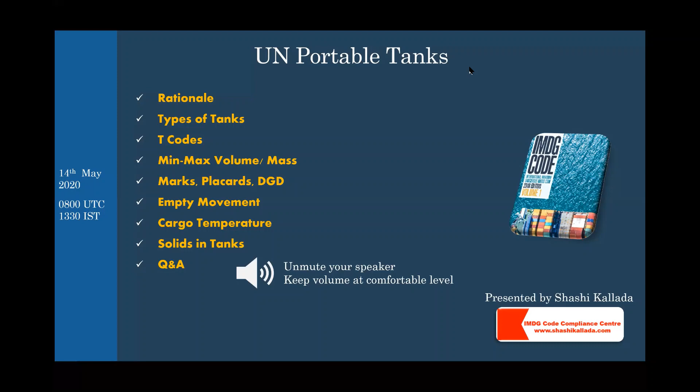IMDG code is the International Maritime Dangerous Goods Code, published by the International Maritime Organization. Every 2 years, the code is revised and republished, taking into consideration the lessons learned from past accidents, as well as new technological developments. One of the most recent revisions happened in the 2016 edition of IMDG code, considering the accident on MSC Flaminia because of polymerization hazard.

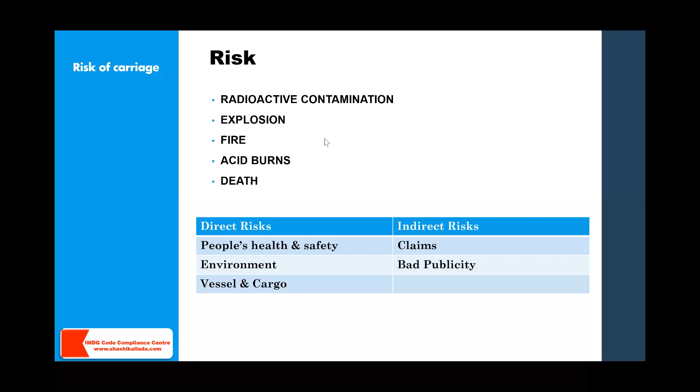This is the summary of casualty and incident reports submitted to the International Maritime Organization in 2018. I have just highlighted certain points related to placarding, marking, documentation, and portable tanks. In this summary list submitted to IMO, you can see portable tanks not covered by CSC convention were 0.26% of the total inspected or found, and some of them had serious structural deficiencies.

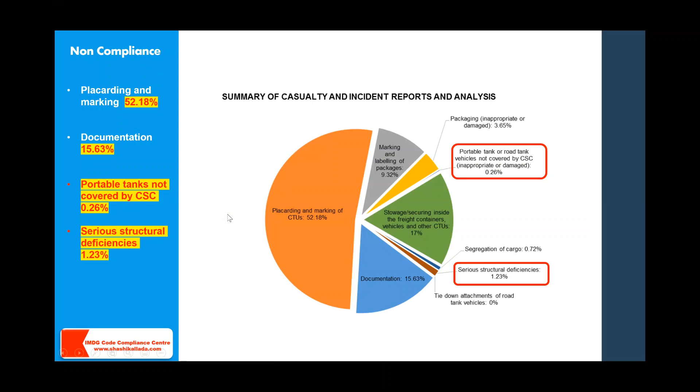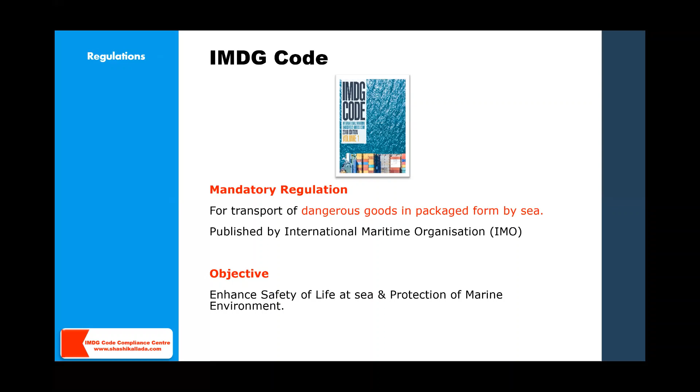Mandatory regulation for dangerous goods by sea is IMDG code. The current edition is the 39th edition published in 2018, which has become mandatory from 1st January 2020 for 2 years. The objective is to enhance the safety of life at sea, protection of the marine environment, and to facilitate free and unrestricted movement of dangerous goods throughout the globe.

When we talk about portable tank, the definition in IMDG code is: portable tank is a multimodal tank for transportation of substances of class 1 and classes 3 to 9. The same definition applies for portable tanks used for transportation of gas, whether non-refrigerated liquefied or refrigerated liquefied gas. Portable tank does not include rail tank, road tank, IBCs, or non-metallic tanks.

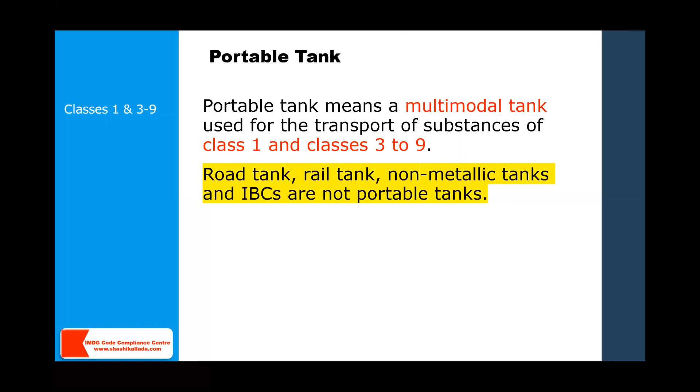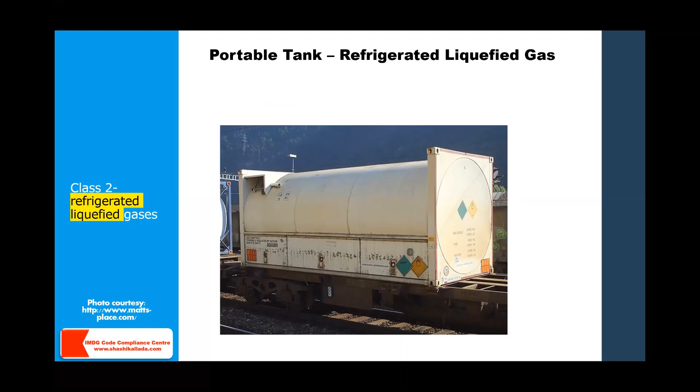These are some images of portable tanks. This one is for refrigerated liquefied gases, that is a cryogenic tank. This one is non-refrigerated liquefied gases, a multiple element gas container. This is listed under the packing instruction in IMDG code, not under tank instruction.

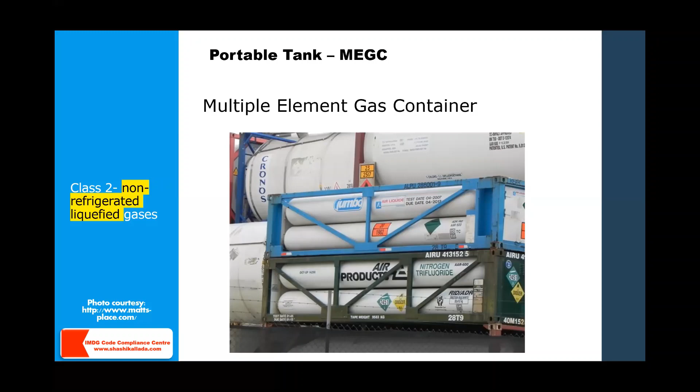IMDG code adopts the recommendations of the United Nations model regulations. The rationale used for usage of tanks for dangerous goods is: any dangerous goods which in large quantity pose a higher hazard or higher risk is not permitted in portable tanks for transport by sea. Some examples are class 1, class 3, desensitized explosives, etc. Self-reactive substances and organic peroxides under 4.1 and 5.2 are only permitted if it is type F.

In a nutshell, when we open IMDG code, any entry not assigned with a T code in the dangerous goods list is prohibited to be transported by tank, unless it is exempted to use a tank by the competent authority of the port state.

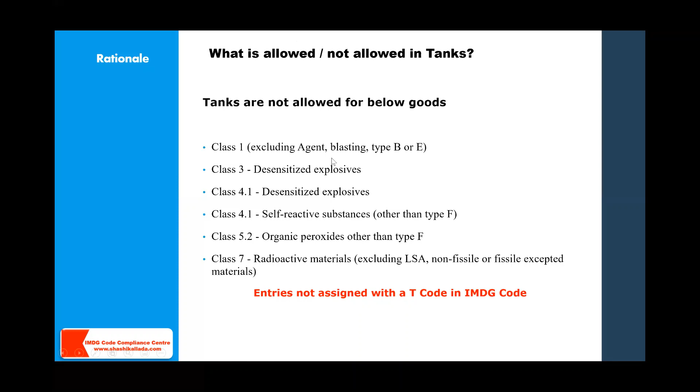There are 25 different types of tanks in IMDG code. T1 to T22 is for classes 1 and 3 to 9. T23 is specifically assigned for class 4.1 self-reactive substances and 5.2 organic peroxides. T50 and T75 is for gases, non-refrigerated liquefied or refrigerated liquefied gas.

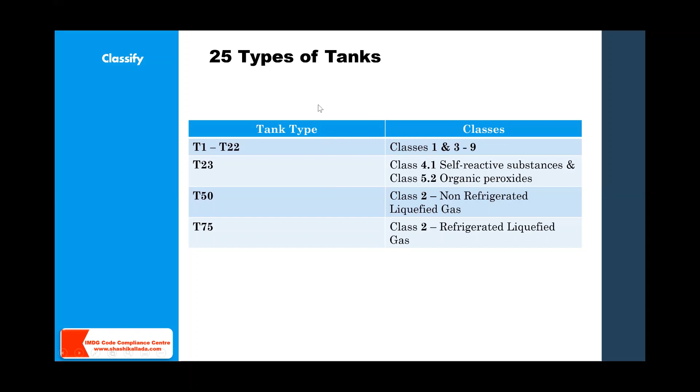These are also tanks. When we say ISO tank, that is a 20-foot framework under CSC convention, then we call it an ISO tank. IMDG code does not use the term ISO tank. IMDG code uses the term UN portable tank, that is the portable tanks constructed according to United Nations recommendations.

If you look at this right-hand side top image, the vertical tank displaying the UN number 3396, that is a special tank, which is actually a T9 tank. T9 is not supposed to have a bottom opening, but this vertical tank has a bottom opening with a special permit from the United States Department of Transportation.

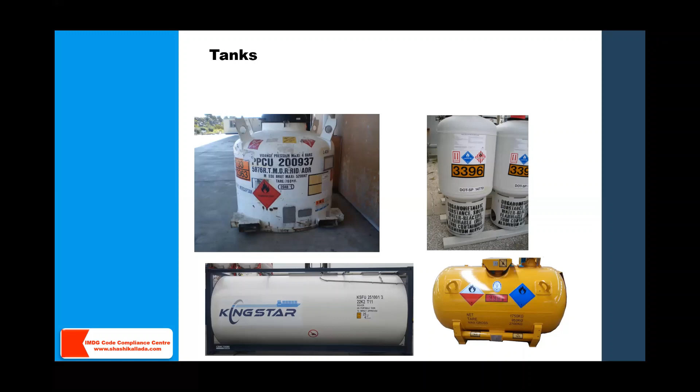So when we say UN portable tank, it can be any size or shape, non-ISO, but it has to be in accordance with chapter 6.7 of IMDG code.

The major differences between T1 and T22 tanks are based on the test pressure in bar, shell thickness, pressure relief provisions, and bottom opening provisions. I will run through a couple of slides highlighting the major differences between these types of tanks, T1 to T22.

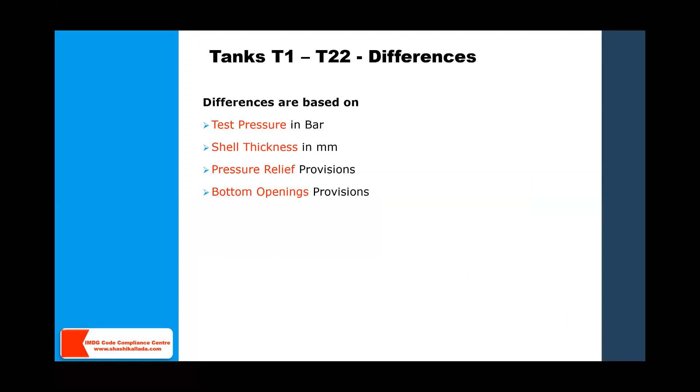IMDG code in part 4 has listed T1 to T23, what must be the minimum test pressure for each type of tank, what must be the minimum shell thickness depending on the density of the cargo being loaded, and what must be the provisions for pressure relief and bottom opening. These are all the T1 to T22 differences.

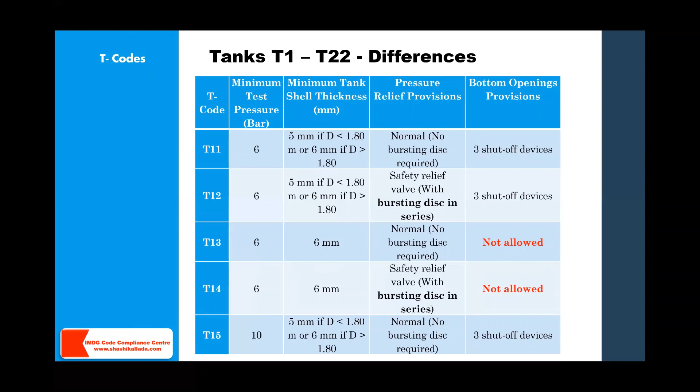T11 is the most commonly available tank with tank operators. T11 has a lot of advantages. T11 has a test pressure of 6 bars and 3 shut-off devices. It does not require a bursting disc.

When we go to the higher numbers, it requires more test pressure, more thickness of the shell, and bottom opening is not provided. Bottom opening is prohibited for highly hazardous substances and corrosive substances which can cause unknown corrosion to the ship structure.

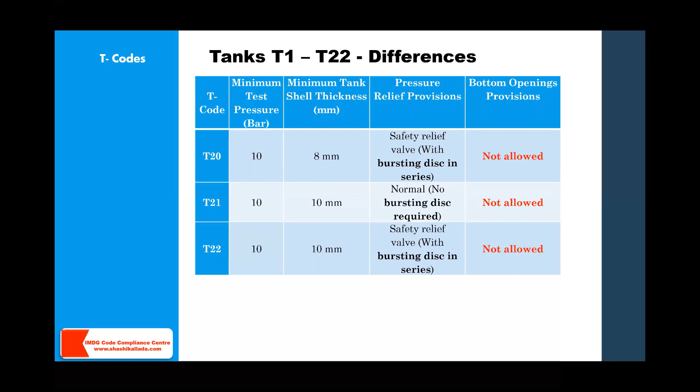In this chart, you can see in the green color T1 to T23 listed. That is the tank assigned by IMDG code for each and every UN number the tank is assigned to. If IMDG code has assigned T1, then the tanks in blue color can also be used.

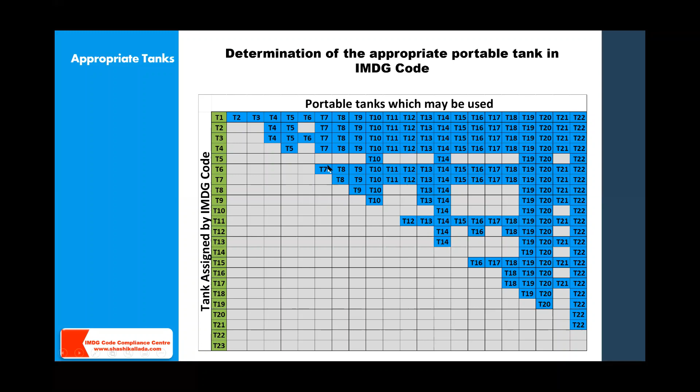There is a provision in chapter 4.2 in part 4 of IMDG code: if a tank is assigned in the dangerous goods list, which other tank types may be used for transporting the same dangerous goods? The other tank types always have higher safety measures than the tank assigned in IMDG code.

When we look at the entire data of IMDG code, all the 2,600 plus UN numbers and tank codes, we will know that T11 tank is the most advantageous tank for tank operators, because T11 can be used for more than 1,500 dangerous goods entries in IMDG code.

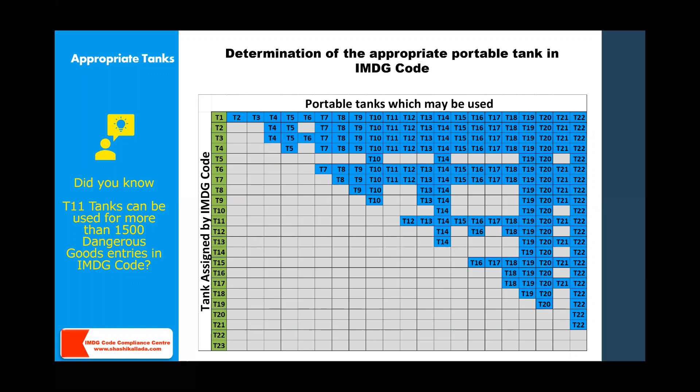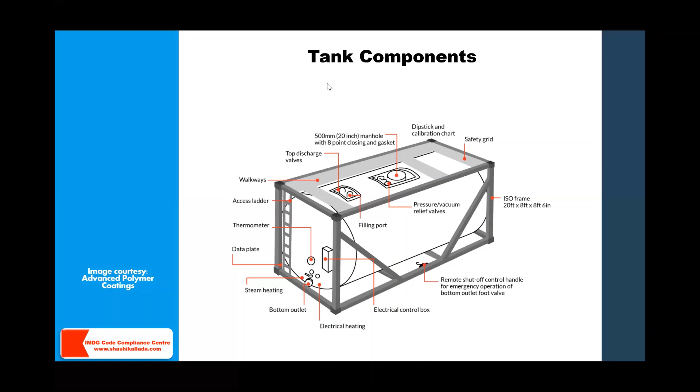Let's walk through each of the major components in ISO tanks or UN portable tanks and what are the requirements of IMDG code, and why they are important.

Pressure relief: as per IMDG code, any tank which has a capacity greater than 1900 liters must be provided with a pressure relief device, and this pressure relief device must be spring loaded. It can also have a frangible disc in parallel with it.

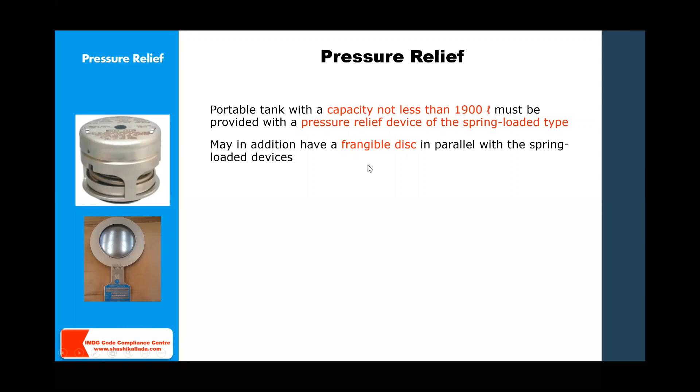Frangible disc and pressure relief device are set at a pressure required by part 6 of IMDG code. Whichever tank has a test pressure greater than 4.5 bar, the frangible disc must be set at 110% of two-thirds of the test pressure. For example, T11 test pressure is 6 bar, so the PRV, pressure relief valve, is set at 4.4 bar. In case you want to use a bursting disc, then the bursting disc or frangible disc must be set at 4.8 bar.

The way we use this frangible disc: if we install a frangible disc on T11, it becomes T12.

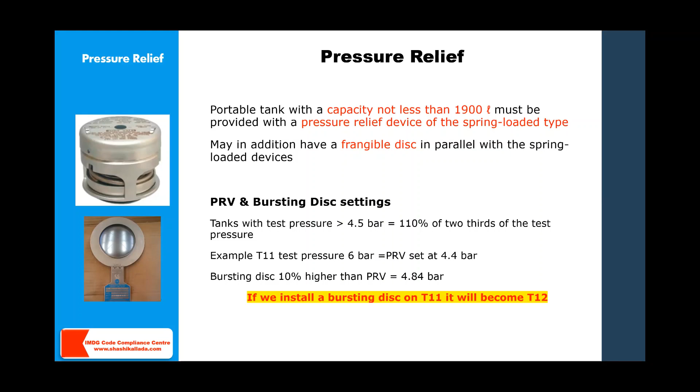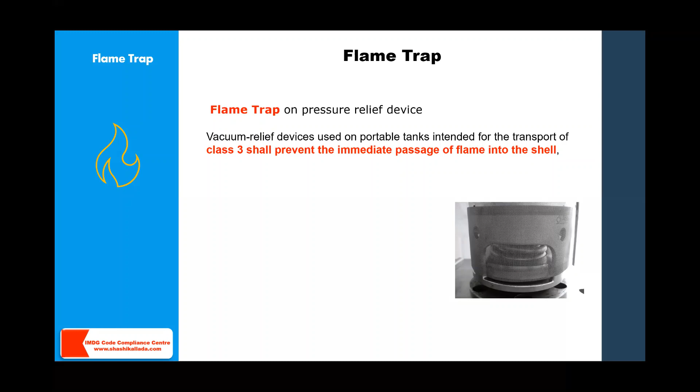Flame trap: IMDG code says ISO UN portable tanks intended to carry flammable liquids having a flash point of 60 degrees and below must have a flame trap kept on the pressure relief device to prevent external fire flame from entering the tank, or the shell of the tank must be able to withstand an internal explosion.

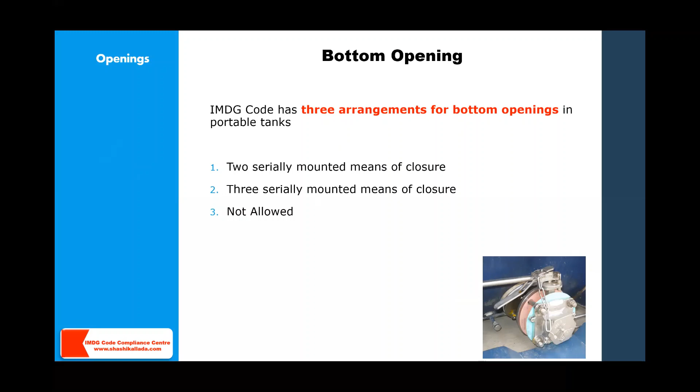Bottom openings: IMDG code has 3 provisions for UN portable tanks — bottom opening with 2 serially mounted closures, 3 serially mounted closures, or bottom opening prohibited. When we talk about 2 serially mounted closures, it is for certain crystallizable solids, normal solids, or highly viscous substances. Those dangerous goods require only 2 serially mounted closures.

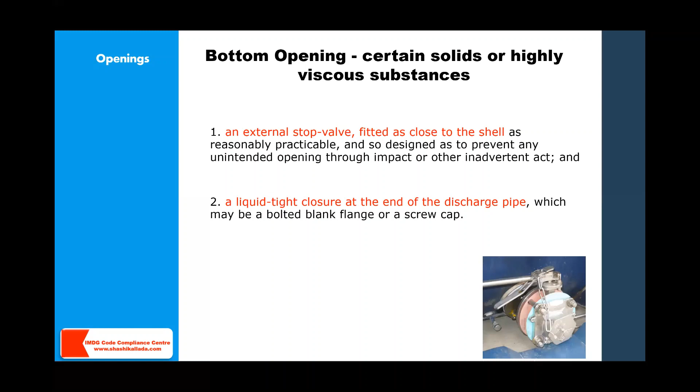When we come to other dangerous goods, for dangerous goods liquids, IMDG code requires 3 serially mounted bottom closures. The first should be a self-closing internal stop valve, then an external stop valve, then what we call the threaded cap. If this threaded cap is missing from the tank, then it will fall out of the requirement of the 3 closing mechanisms.

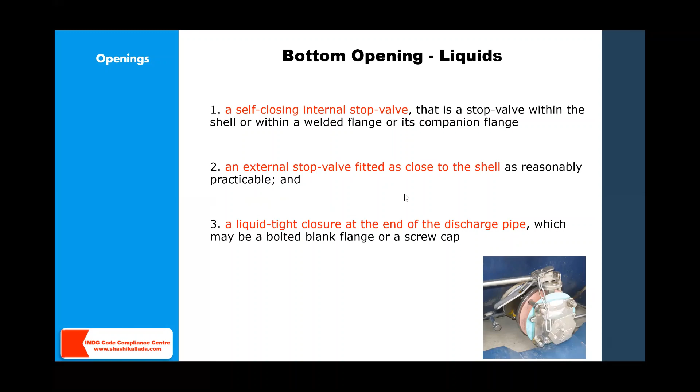Emergency shutoff. There is a cable running parallel to one side of the tank. In case of an emergency, if we pull the cable, the discharge valve will shut down and stop the flow of the cargo.

Also, this emergency shutoff can have a fusible element. In case there is a fire engulfment, the fusible element will melt and shut off the discharge valve.

Every tank has a document folder which can be used as good practice by the shippers for keeping a copy of the dangerous goods declaration, safety data sheet, and last inspection certificate, so it's readily available for whoever needs to know more details about the cargo. But many times I have found dried leaves and other rubbish inside it in practical scenarios.

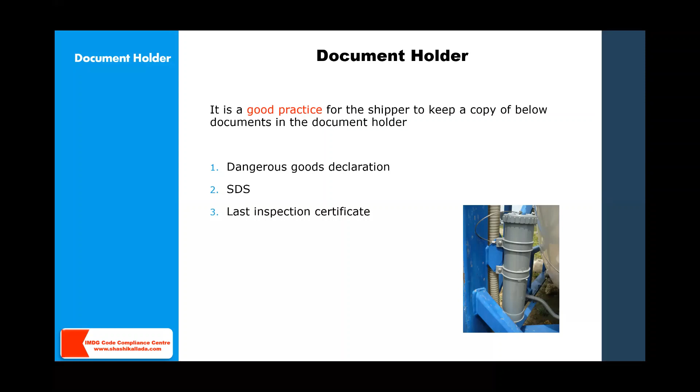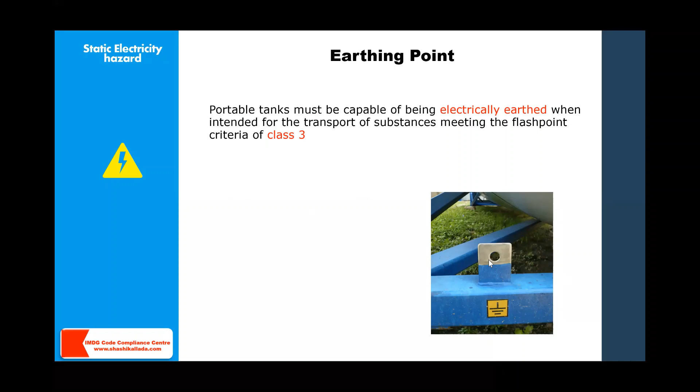Earthing point on the framework of the tank. IMDG code requires an earthing point for grounding the tank to avoid static electricity whenever we load a cargo which meets the criteria of class 3, that is flammable liquid. It must be provided and must not be painted - if we paint it, electrical earthing or grounding will not be possible.

Heating. All tanks have steam heating provisions. Some tanks may have electrical heating pads also. Heating is required when we fill solid cargo above their melting point and allow it to cool down and solidify during transport. At the discharge point, the consignee can reheat the cargo, turn it into liquid, and empty the tank.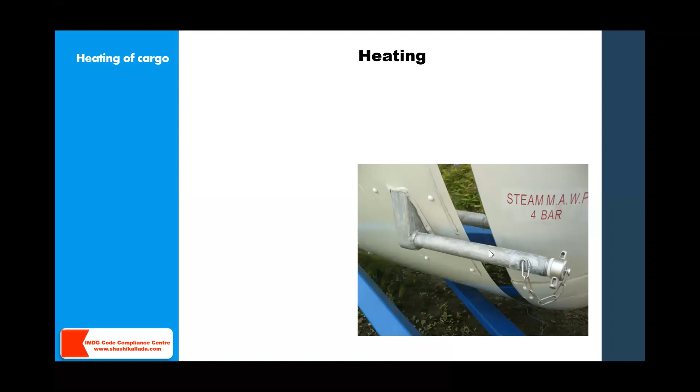Every tank has a temperature gauge. The temperature gauge will show the temperature in Celsius and Fahrenheit.

Solids in tank. IMDG code permits certain solids in UN portable tanks, or what we call ISO tanks, like granular and powdered solids, or solids filled and discharged above their melting point, cooled down and transported as a solid mass, or transported above their melting point. Whenever solids are permitted in a tank, IMDG code authorizes the tank with a tank provision TP33 in the dangerous goods list.

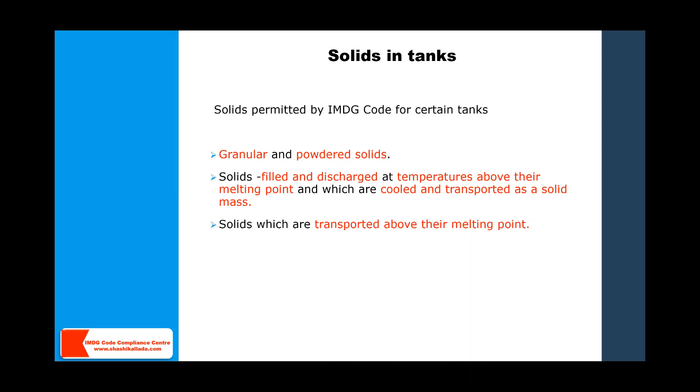Filling and discharging can be through gravity or through pressure. Those red colored tanks are for discharging, and the green color overhead tank and below ground level tanks are for filling. Pressure discharging and pressure filling can be with nitrogen or air pressure, or with electrical pumps. While filling and discharging, flammable vapors can be vented back to the original tank for safety reasons and for collecting the flammable vapors.

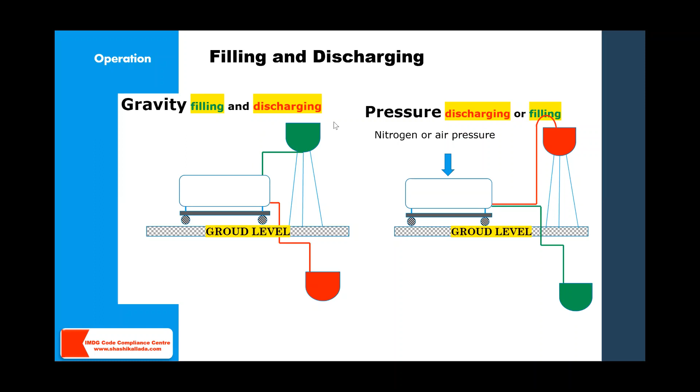There are different types of tank. One is compartment or bulkhead. Compartment or bulkhead is what we normally see on the road, the petrol tanks and diesel tanks, which has 5,000 or 6,000, 4,000 liters each compartment.

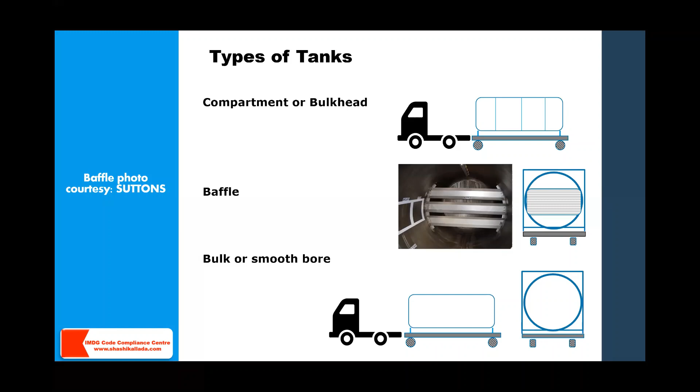Then comes the baffle tank. Baffle tank will have a baffle in the center of the tank, or two baffles, for reducing the motion of the liquid during movement. The third one is smooth bore or bulk tank. This has a major role in the stability of the tanks when in movement. Surge of cargo is the main requirement for this bulk tank.

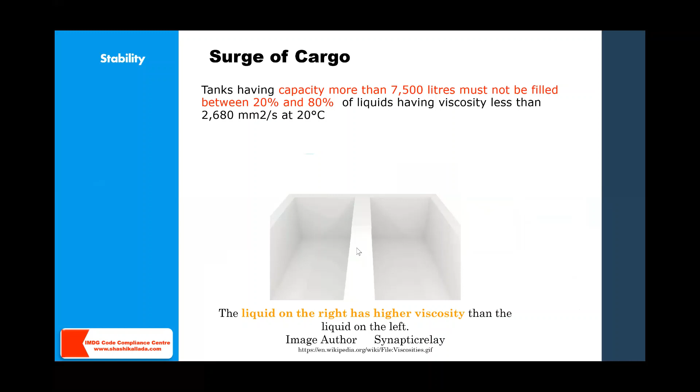You can see in this image that the right hand side orange color liquid is more viscous than the left hand side blue color liquid. Viscosity is the resistance to flow. Can you hear me now? Okay, you can hear - viscosity is the resistance to flow.

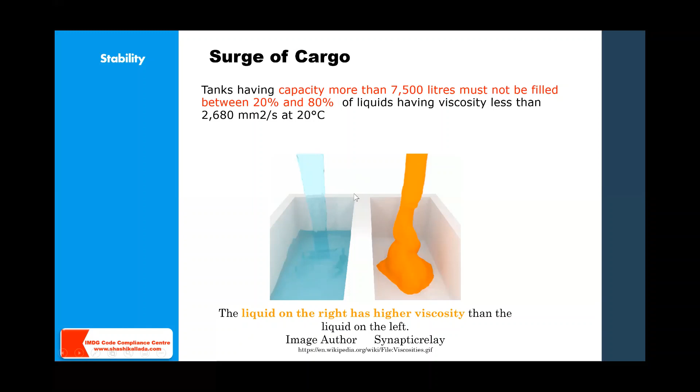So hence, as per international regulation - ADR for Europe and IMDG code for sea transport and all other modes of transport - if a tank has a capacity greater than 7,500 liters, then the liquid cargo must not be between 20 and 80%. It must always be above 80% or below 20%. Above 80%, there is also a requirement of how much above 80%. This is to reduce the motion of liquid inside the tank during transport.

I have tried to make some drawings in PowerPoint, I hope they depict the actual scenario. When the tank is in motion, the liquid will move longitudinally and athwartship from side to side, which can affect the stability of the road vehicle. Also, when the tank is loaded on the ship half full, say 50% or 60%, if the liquid is moving when the ship is rolling, it will put undue stress on the structural equipment of the tank.

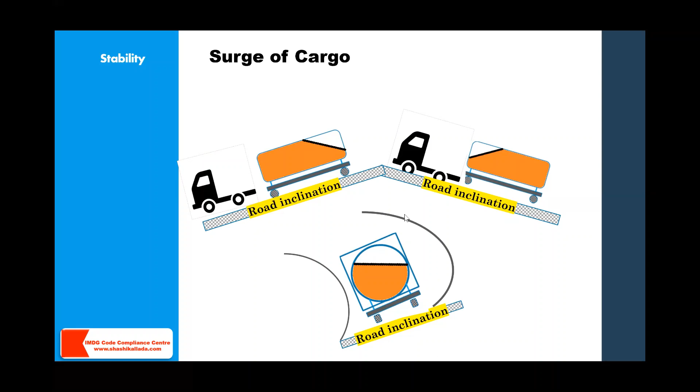Many shippers and a couple of tank operators had asked in the past whether this 80-20 rule is applicable for non-hazardous liquid. Yes, it is applicable for non-hazardous liquid, but it is not mentioned in IMDG code or ADR road regulations, because ADR and IMDG code talk only about hazardous cargo. But when we look at the CSS code, the Code of Safe Practice for Cargo Stowage and Securing, that code says portable tanks should not be offered in a condition liable to produce unacceptable hydraulic force due to surge.

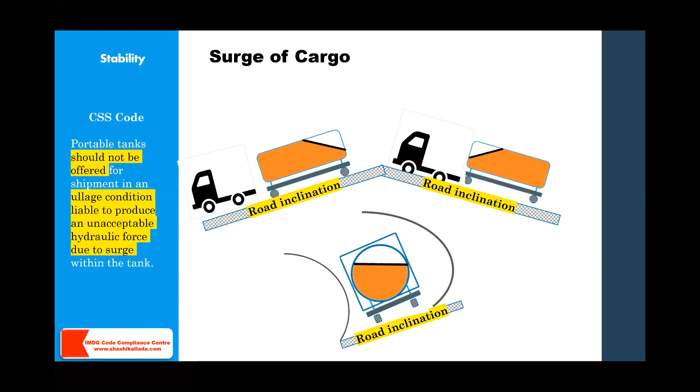If we fill a tank lesser than 80% and above 20%, there will be a noticeable surge between 70 to 80%, and a dangerous surge between 40 to 60%. This is why the 80-20 rule is there.

Even if it is above 80%, the driver of the vehicle must be trained for defensive driving, and he or she should know that the speed limits mentioned on the road are for normal private vehicles, not for commercial vehicles. If the speed limit is showing 80 kilometers per hour for cars and other normal private vehicles, the trailer carrying the liquid cargo tank must be driven at much lesser speed than the maximum speed limit shown on the roads.

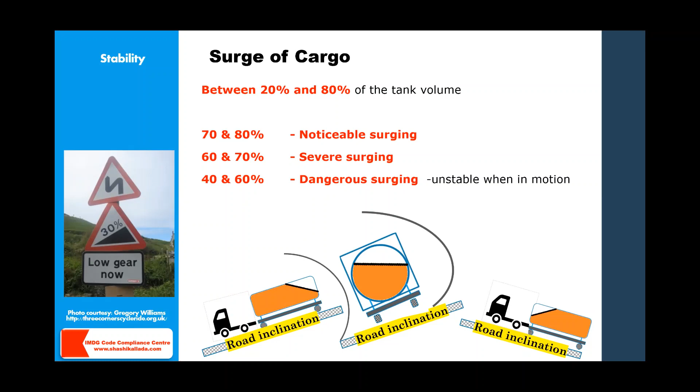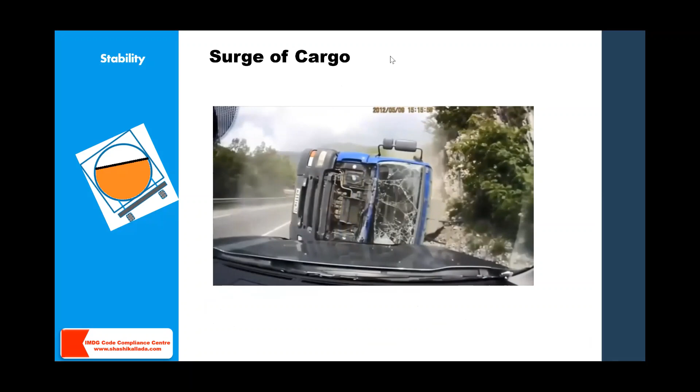From the Russian dashcam vault comes this lucky escape. A petrol tanker rolls on a bend and, unbelievably, no one gets killed. The truck driver does have some carpet burn from being thrown about the cab, but that did not stop him trying to get out.

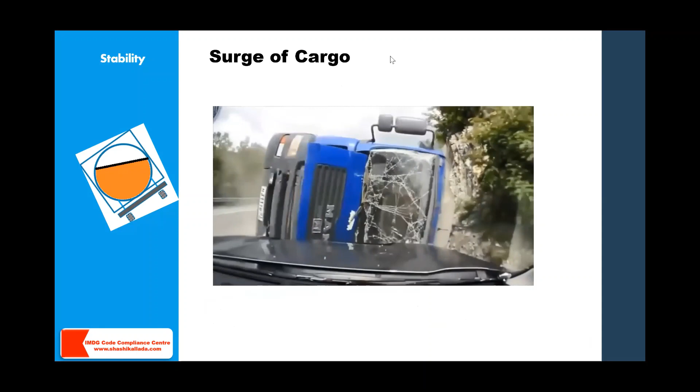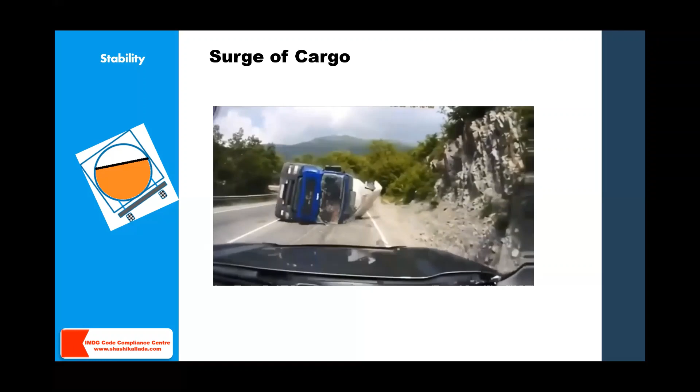I hope you could see that video playing of a tanker capsizing on the road. Let's talk about the degree of filling.

Above 80%, there are two formulas in IMDG code part 4: 97 divided by, and 95 divided by. It is stipulated through the tank provisions TP1, TP2, and TP3 for solids, and TP1 and TP2 for liquids.

How much above 80% can be filled? This depends upon the thermal expansion coefficient of the cargo which is being filled in. For using this formula to calculate the maximum permissible volume limit for a tank, the shipper and the tank operator should know the thermal expansion coefficient of the liquid, which is the alpha in this formula.

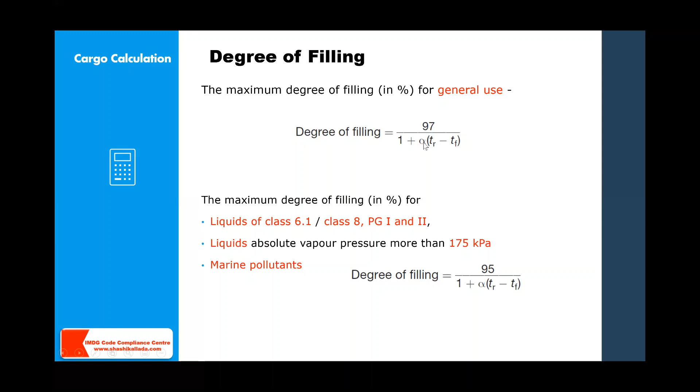That alpha is the mean coefficient of cubical expansion of the liquid, then the temperature of the liquid during filling, and the mean bulk temperature during transport. Temperature of the liquid during filling is always considered as 15 degrees, and the density at 15 degrees, and mean bulk temperature is always taken as 50 degrees for the calculation purpose.

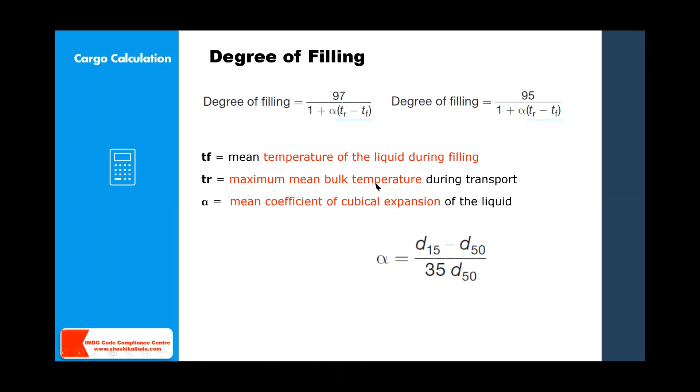Cargo mass, maximum permissible cargo mass, is given on the plate which is fixed on the tank, also in the tank certificate, the inspection certificate. Maximum payload should not increase. There is a tare weight, maximum payload, and maximum permissible gross mass.

So when we are filling a high viscous liquid or high density liquid, when we do the calculation of above 80%, we must ensure that it must not cross the payload. Also, the total weight of the tank with the cargo must not exceed the weight limit of the roads through which the tank will be transported.

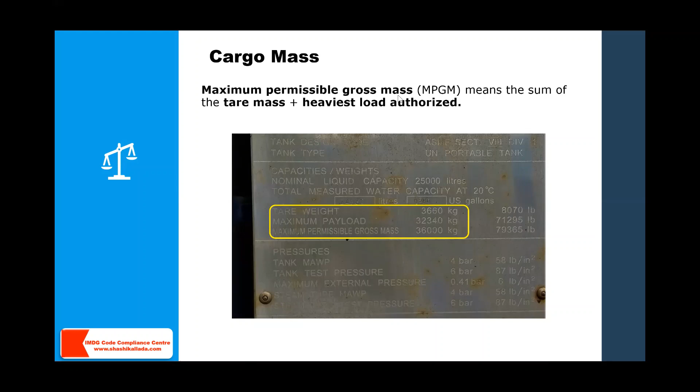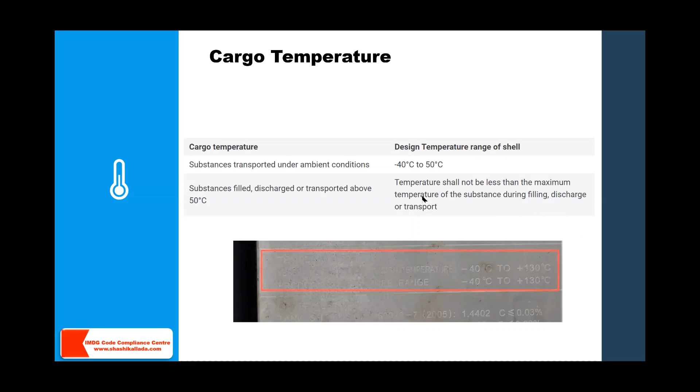Nitrogen blanket: IMDG code requires nitrogen blanketing of the tank for certain cargoes, wherein the tank provision will ask for eliminating the air with nitrogen or any other means. Other than IMDG code, for increasing the shelf life of the cargo or protecting the tank shell, shippers and tank operators may recommend a nitrogen blanket.

By applying nitrogen blanket, we are reducing or eliminating the oxygen level, so the shell of the tank together with the cargo will not keep reacting with the oxygen, causing corrosion and pitting inside or contaminating the cargo.

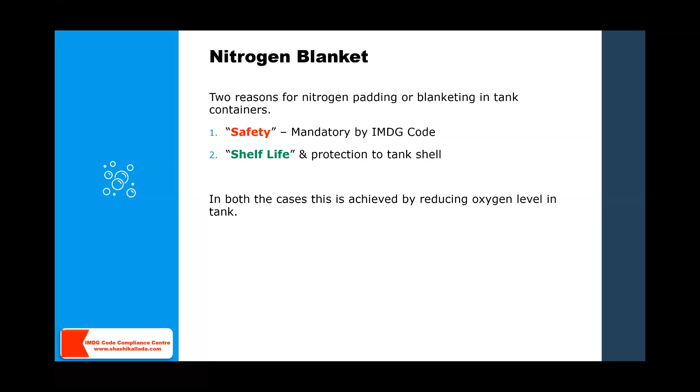Marking and placarding. When we fill dangerous goods inside the tank, many times I get a question about where to display the proper shipping name, whether to display the UN number, etc. It is very easy to remember: columns 1 to 4 of the IMDG code dangerous goods list give the UN number on all 4 sides, proper shipping name on the 2 longitudinal sides of the tank, then class and subsidiary hazard placards, and if it is a marine pollutant, then the marine pollutant mark on all 4 sides.

Proper shipping name is mandatory on the 2 longitudinal sides, not on the front and rear end, but if you display it on the front and rear end, it is not prohibited.

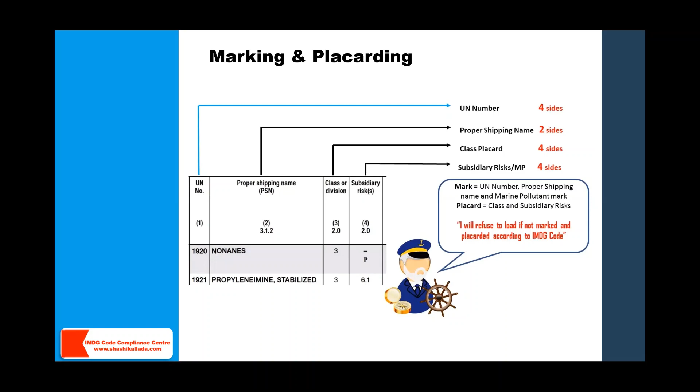There is a requirement for the font size of the UN number and the proper shipping name also. The UN number, if displayed in an orange panel, must be at least 65 mm high, with a 120 mm height and 300 mm wide orange panel. The orange panel's black border must be at least 10 mm.

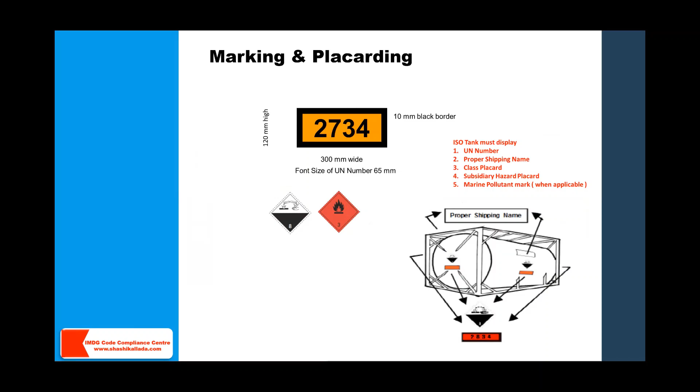Periodic inspection of the tank: every 2.5 years and 5 years, the tank is supposed to undergo periodic inspection. The 5-year inspection will also include a hydraulic test, after which a periodic inspection certificate will be issued, and the date and year will be punched on the tank plate.

If a tank is due for its next periodic inspection, the IMDG code authorizes transport of that tank beyond the expiry date of the periodic inspection, provided the cargo is filled in the tank before the inspection is due. This transport is permitted only for a maximum period of 3 months. It can exceed this in case you are returning the tank for disposal of the cargo, etc.

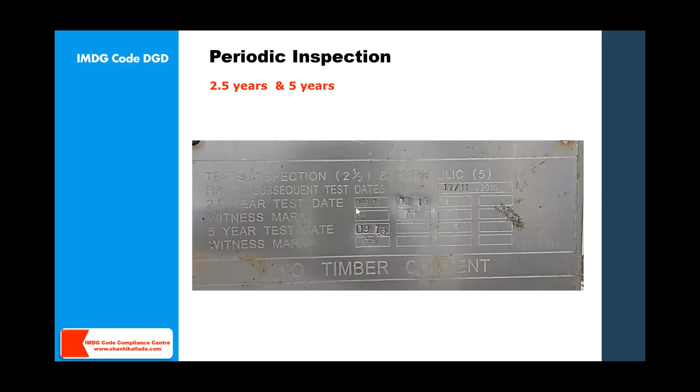Also, if the tank is carrying only dedicated cargo, the same cargo in round trip voyages, then the 2.5 year periodic inspection may be waived off in consultation with the classification authority, that is, the competent authority who issues the tank certificate.

Since we talked so much about the tank, I will quickly refer to a special tank, the helium tank. Refrigerated liquefied helium's boiling point is minus 268.9 degrees Celsius. Refrigerated liquefied helium tanks are called cryogenic tanks.

It will have an external tank with liquefied nitrogen, which will absorb the heat of helium. This helium tank will keep purging the boil-off of nitrogen during the voyage. So the shipper will calculate the holding time for the entire transit and fill the extremely cold cryogenic liquefied nitrogen and liquefied helium in the tank.

The hazard of this tank is that, in case of an uncontrolled discharge of liquid helium or liquid nitrogen, it is extremely cold, cryogenic. So if the ship's superstructure is exposed to that, the steel of the ship will become brittle, and it is a highly health hazard for bringing the oxygen level down.

That is why these tanks are not permitted to be loaded under deck. It used to be permitted under deck 10-12 years before, but 1 or 2 longshoremen in US ports were exposed to discharged nitrogen with low oxygen in the cargo hold of a ship, and 2 of them lost their lives. Since then, the IMDG code prohibited loading refrigerated helium tanks under deck on ships.

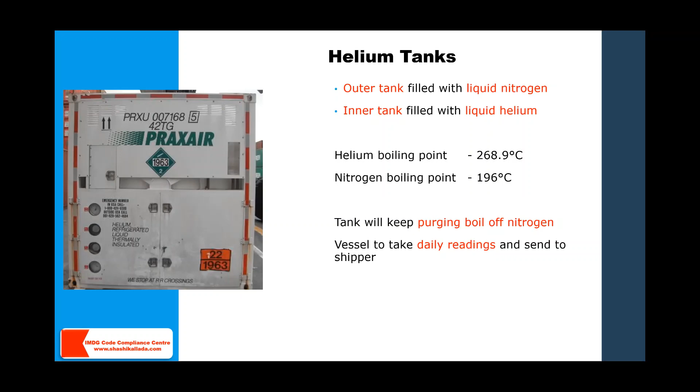Helium tanks, people, are you able to hear me now? Someone said I am not audible.

Okay. When helium tanks are loaded on a ship, the master is supposed to send daily reports to the shipper, morning and evening. The master must send the ship's name, call sign, etc., latitude, longitude, the weather condition, and the pressure and liquid level of both helium and nitrogen.

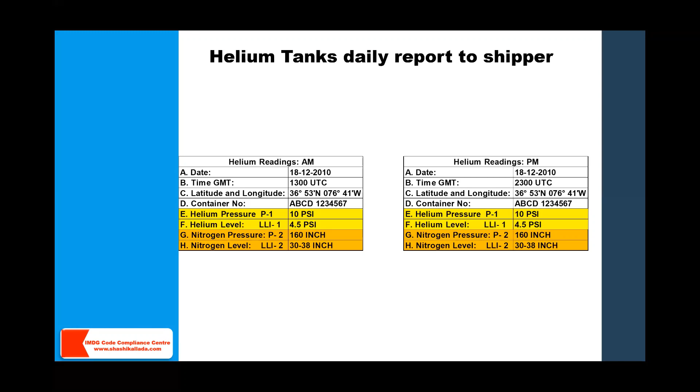So the shipper can monitor the daily readings of morning and evening and advise the ship staff in case they need to purge out a part of the helium or nitrogen for maintaining the internal pressure.

Now let's talk about the dangerous goods declaration. I will not go much into detail and hold you back. The requirement and mandatory information for the dangerous goods declaration is given in part 5, chapter 5.4 of the IMDG code.

Box number 20, the container/vehicle packing certificate, need not be signed for tank containers because we are not packing the container for a tank, but the shipper's signature must be there in box number 22. In case it is an empty, uncleaned tank, after the UN number, proper shipping name, hazard class, packing group, etc., the shipper must mention the words 'empty, uncleaned' or 'residue last contained'.

As per the IMDG code, when we talk about gross mass, the tare mass of the tank is not included in the gross mass for dangerous goods. That is mentioned in part 1, chapter 1.2 of the IMDG code.

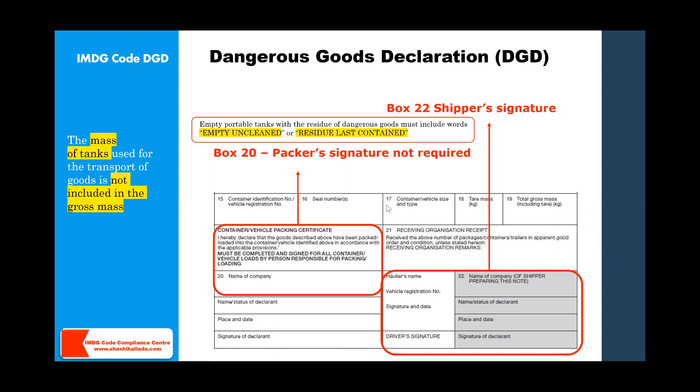I will quickly mention the advantages of T11 for the tank operators attending this seminar. Most of the tank operators have T11 tanks. T11 tank is one of the most advantageous tanks for tank operators, because it can be discharged and loaded from top as well as bottom.

If it is SS316L material, it is compatible with most dangerous goods. It can be operated from ground level. In case the cargo solidifies, the steam coils are in the bottom half of the tank, so the bottom half of the solidified cargo will first liquefy, making it very easy to discharge.

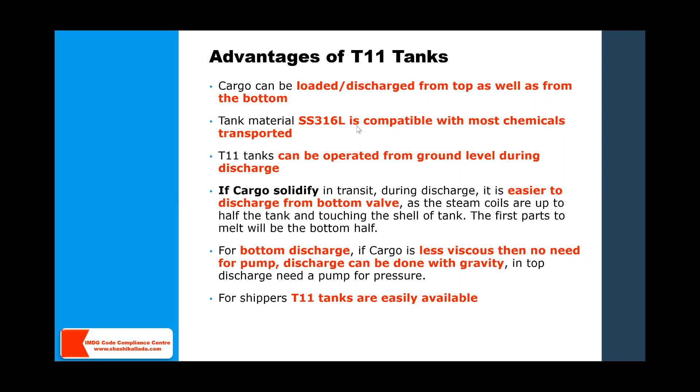Less viscous, free flowing liquids can be discharged by gravity without using any electrical or pneumatic pumps. For shippers, it is very easy to get T11 tanks. And for T12 tanks, as I mentioned before, if we fix a frangible disc for T11, it will change into a T12 tank.

Now we will look at liability. Liability is one of the most important things for transportation. In transportation, multiple parties are involved in shipment of dangerous goods in tanks. If it is not a shipper-owned tank, there is a shipper, a tank operator, then the carrier, that is the ship, and the vessel's master who is responsible for stowage on board.

Currently and in the past, most NVOCCs and freight forwarders work like a post office. They collect information from the shipper and just pass it on to the carrier. If the carrier asks for the material safety data sheet, the forwarder or NVOCC will ask the shipper to send it by email, and without even opening it, just pass it on to the carrier. Or some will open the safety data sheet and go directly to section 14 for transport information without reading other sections. This is a very wrong and dangerous practice.

We should not think that because freight forwarders or NVOCC's name is not listed or their role is not listed in the IMDG code, they are not responsible. That is a wrong assumption. It had been going on for many decades.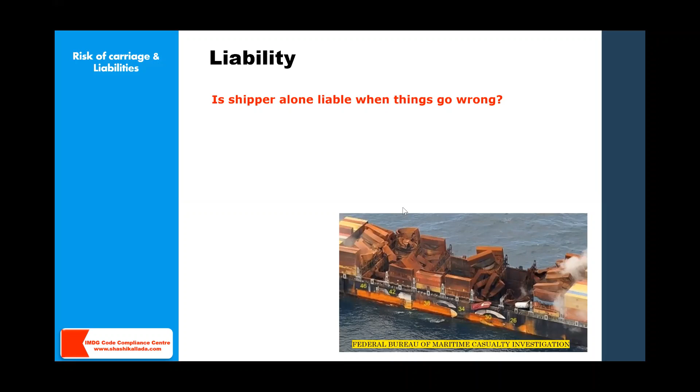After the MSC Flaminia's accident in 2012, you can see the photograph here. The United States New York District Court's judgment kept the liability at 55% to shipper and 45% to the tank operator. If you look at that judgment, it is about 30, 40 or 50 pages.

If you have the patience to read through, you can understand where the NVOCC, the tank operator, and the shipper failed in discharging their duties without showing due diligence for the cargo offered for transport, including filling the tank much before the vessel called the port or loading onto the vessel, and exposing the tank to daily sunrise and sunset with differing temperatures, which resulted in polymerization and explosion on board MSC Flaminia, sadly resulting in 3 of the seafarers losing their lives.

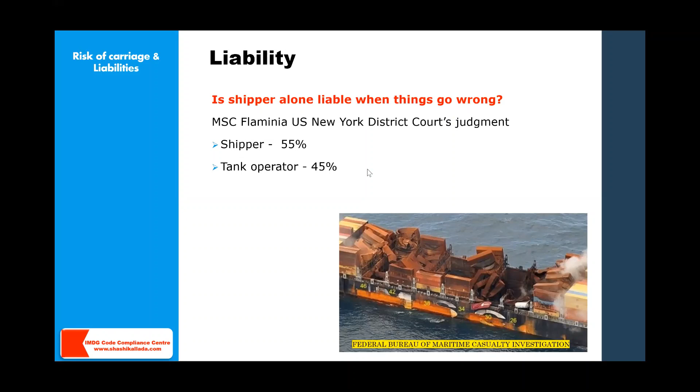So that's it in this webinar. One thing I will highlight here: as per IMDG code, it is mandatory for all shoreside people to be trained in IMDG code. Training must include initial training and recurrent training whenever the IMDG code changes.

If a shipper or tank operator is offering dangerous goods in UN portable tanks to the carrier, they must be trained in use of UN portable tanks, calculation, placarding, marking of the tanks, dangerous goods declaration, and security of dangerous goods in transport. This security comes under the ISPS code for high consequence dangerous goods in transport, covering what additional security measures are required when goods are in transport or kept in a port or terminal awaiting subsequent loading or collection by the consignee.